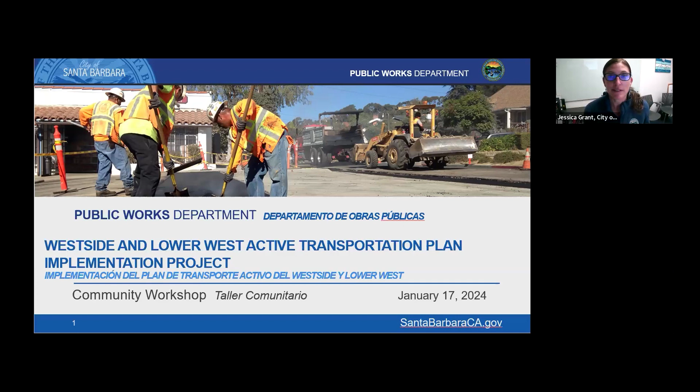The purpose of tonight's webinar is to provide some background on the council-adopted Westside and Lower West Active Transportation Management Plan, the funding we received from the Active Transportation Program, review the conceptual plans for the project, and review next steps on how to stay involved. Again, questions and feedback at the end. At any point, you're welcome to type in your question. We will answer both typed questions and if you want to raise your hand at the end, that works.

So let's get into it. The purpose of the Westside and Lower West Active Transportation Planning effort was to increase Westside neighborhood livability by addressing pedestrian, bicycle, and traffic safety issues and implementing the Vision Zero strategy. For those not familiar with Vision Zero, it's a council-adopted strategy aimed at eliminating all fatalities and severe injuries on city roadways. There are priority corridors designated throughout the city, one of them being San Andres.

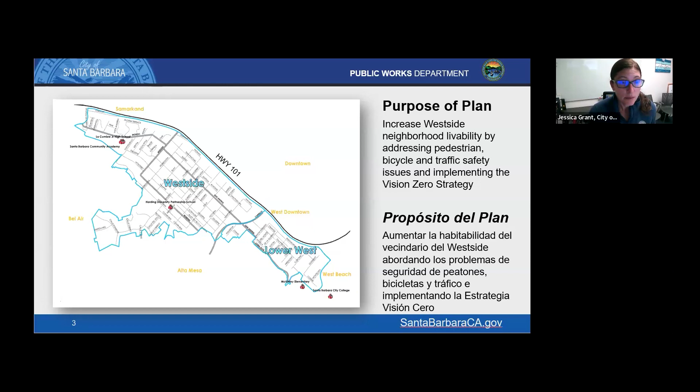So what happened during this planning effort? Back in 2019, we reached out to Westside and Lower West residents to receive their feedback on walking, biking, and driving in the Westside and Lower West neighborhoods. In addition to the in-person workshop, we also did a supplemental survey, and separately, our traffic engineering staff did a collision data analysis.

We wanted to hear from residents what their concerns and stresses were on how they navigate from their home to neighboring parks, schools, and neighborhood services. What were some of those stress points, and were we also seeing that reflected in our collision data statistics?

Then we came up with approaches on how to lessen those stresses, and we held another community workshop back in 2019 that received additional community feedback on what was liked and supported. All of that was summarized in the Westside Lower West Neighborhood Transportation Management Plan, which went through review and approval from City Council and was adopted back in 2020.

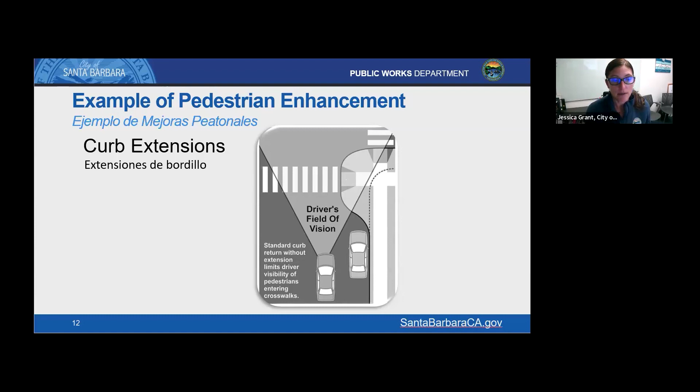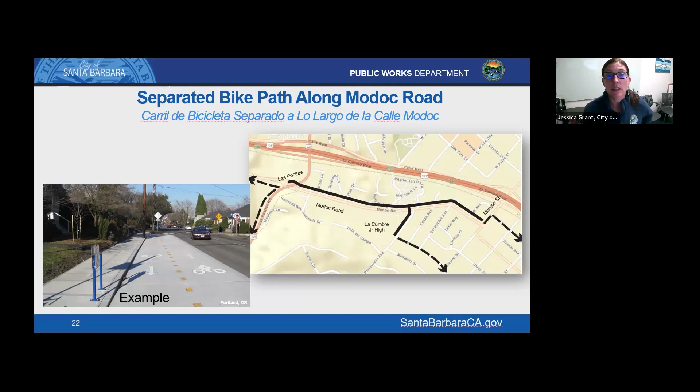So this is again just the same example image, and this is how the existing configuration is along Modoc Road - this is existing, in the daytime. There's no parking on the street from 7 a.m. to 6 p.m., with the on-street bike lanes.

So the graphic below, we would introduce all-day parking on the south side of the street, and then you would have your two-way travel lanes. There would be some sort of buffer between the vehicular traffic and the bike lanes. Here it just shows asphalt lanes, but we're trying to elevate it so it's the same height as the sidewalk, so we have a little bit more of a buffer away from the roadway to introduce that curb.

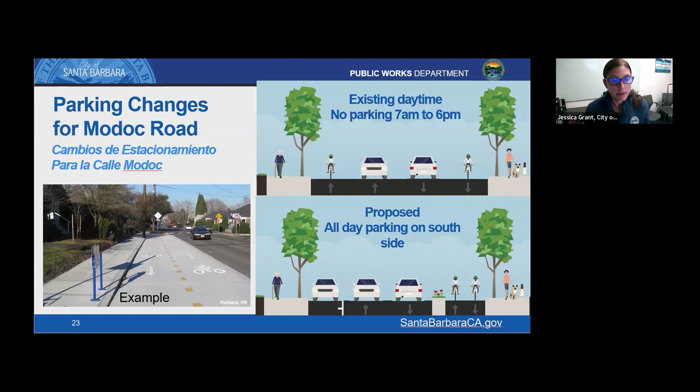And that would be the Modoc piece of it. And there would also be a connection. So this is Modoc and Portesuello, right at the intersection where La Cumbre Junior High and Santa Barbara Community Academy are located.

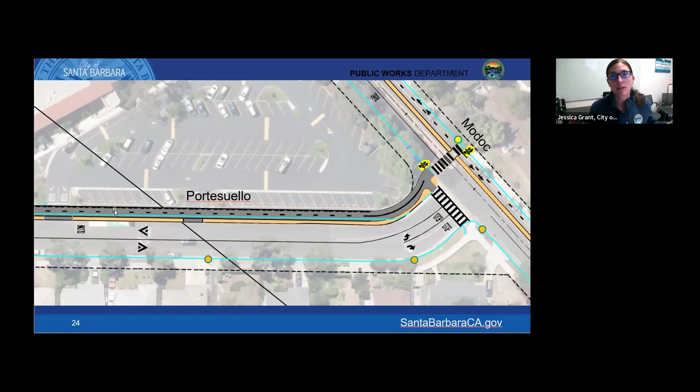So say a student lives on San Pascual, they'd use the bike path and the new updated intersection here with the rapid flashing beacons. Then they'd follow a multi-use path in front of the junior high.

Because as they continue west, that is where the bike parking is for the school. And then those students that live closer to Gillespie Street would come on the bike-friendly Bike Boulevard, then cross the street into the multi-use path just briefly before they can park their bike.

But for residents not going to school who want to go out to Henry's Beach or Arroyo Burro Beach, you'd hop on this, go to Portesuello, then out to Modoc, and connect into the path at the Las Positas Modoc intersection.

The only thing we're still vacillating on before we finalize the bike design on Modoc is right now it's a two-way cycle track on the north side of the street, and we're debating whether to keep it as a two-way cycle track or have one-way cycle tracks on both sides. We're still evaluating what that means for parking.

But we wanted to get your additional thoughts, especially if you're a commuter cyclist or familiar with riding on the west side, to hear your initial thoughts tonight, and we'd love additional thoughts at our in-person workshop. This may warrant a separate meeting all on its own.

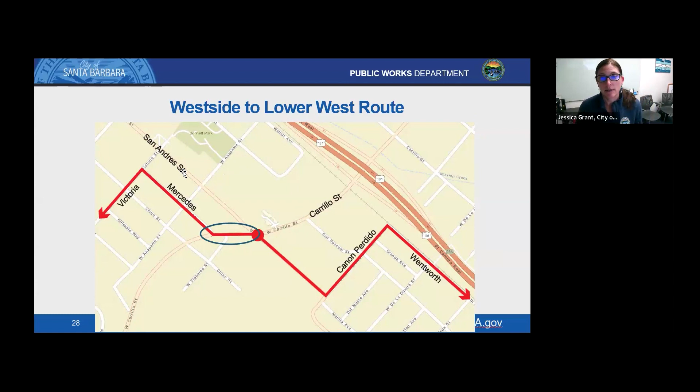So basically, how do we safely get you from the West Side to the Lower West neighborhood? Through community outreach efforts, this was the route we landed on. Again, what we hear from many is that unless you're a very confident cyclist, most do not like to bike on San Andres Street. So what's the parallel street we could use to connect riders from West Side to Lower West?

So from that, you have the bike-friendly street on Gillespie, then you could cut over on Victoria Street and head south on Mercedes Lane. It almost looks like an alley, a much lower volume street compared to San Andres. But once you get there, getting across the street on Carrillo is really difficult, so we still need to get back and land at the San Andres Carrillo intersection.

So here's how we'd address that piece. This is Mercedes Lane, and this is the current existing sidewalk. We propose to widen this and make this connection a multi-use path, so cyclists don't have to cross the very fast-moving traffic on Carrillo to get to the other side.

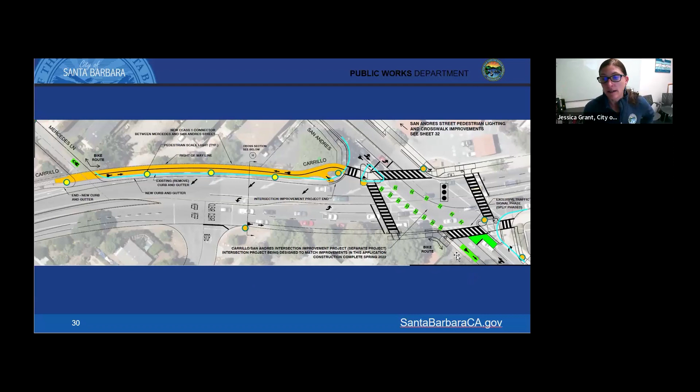This is what it would look like in plan view. Again, this is Mercedes Lane. The orange represents the multi-use path, which gets you to the intersection of San Andres and Carrillo. The green dots represent the wayfinding, or breadcrumbs, to get into an on-street bike lane on San Andres Street south of Carrillo.

So let's look at this piece. This is right now just an image with the church on the right and residential on the left-hand side. Currently, cyclists have to take the lane on this stretch of roadway, and what we've heard from many residents is that's not comfortable.

So we would introduce on-street bike lanes in this section. From a cross section, you would still have your sidewalk, still have parking on the residential side of the street, and then there would be a northbound bike lane, northbound travel lane, southbound travel lane, and a southbound bike lane. Parking would be removed on the church side of the street to accommodate this.

This is what it looks like in plan view. Again, we're crossing Carrillo Street and would go right into the on-street bike lane. This is the southbound route as you go into the Lower West neighborhood, with southbound traffic lane, northbound traffic lane, northbound on-street bike lane, and still have the parking lane.

We would also add some additional roadway lighting in this corridor, and then eventually you get to the Canon Perdido San Andres intersection. We have some intersection improvements here that would benefit all road users, with a big curb realignment at this point to decrease the distance for pedestrians getting across the street.

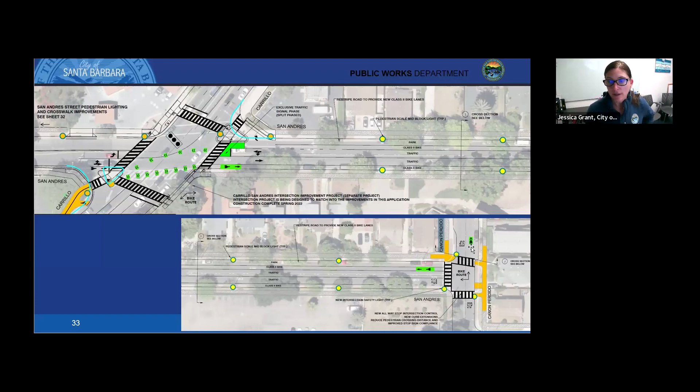For cyclists going further into the Lower West neighborhood, we also heard from many West Side residents that they continue on through the Lower West to get out to the waterfront. So this would be the connection here, following Canon Perdido Street into Wentworth. Wentworth is already a very low volume street, and then again you'd navigate your way out to the Lower West neighborhood to the waterfront.

What's not part of the planning effort, but we wanted initial feedback on tonight and at the in-person workshop, may warrant a separate meeting. We wanted to hear resident thoughts on whether we need a higher level facility on Micheltorena between Gillespie and San Andres. Right now, it's just cyclists taking the lane in that section of roadway, and we wanted to hear your feedback.

This is just one image, one block — I believe it's the 700 block of Micheltorena. What you see off in the distance, I grabbed this from Google Earth, is a Foodland right here. So what that would look like is we would potentially introduce a westbound lane coming into the neighborhood. As you know, when you go over the Micheltorena Bridge, there's now a nice designated protected bike lane, and we wanted to hear thoughts of continuing this bike lane for the couple blocks to get to Gillespie, which is one of the bike-friendly streets in the neighborhood.

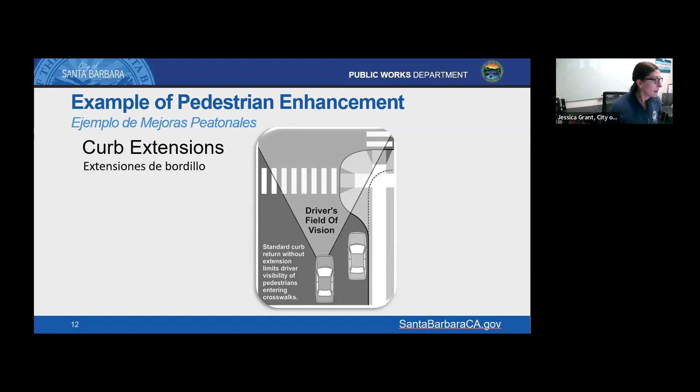Next question: How do bikes turn left from a two-way cycle track on the right side of the street, north side of Modoc, for example? As a cyclist, I highly prefer a one-way bike track on each side of the street.

Can you repeat that one more time? So turning left on the two-way cycle track—I'm missing the destination. It doesn't really give a destination. It just says, how do you turn left from a two-way cycle track on the right side of the street? They use the example of the north side of Modoc. I guess it's just kind of transitioning from a two-way.

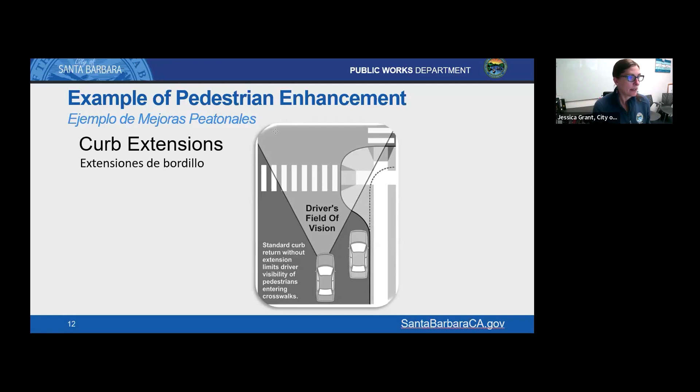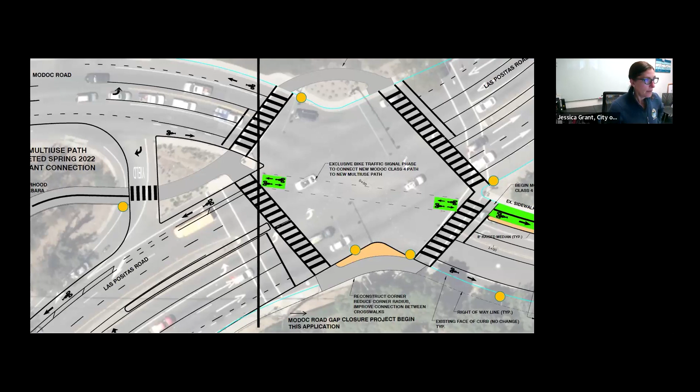It's a longer answer, and it depends on the particular intersections we're talking about for those left turn movements. For example, this would be the connection at Las Positas and Modoc. This would be the two-way path. If you're coming from the west side and want to go on the Las Positas Modoc multi-use path, we would introduce a signal phase for a diagonal connection into the path. I'll have to provide more detail.

The other left turn movements that would probably be most used would be getting into the school—that would be the Portesuello connection as well. The easiest part is that we have the layout and plans on our website. If there's more time, because I want to make sure we get to the majority of questions, I think you'll be able to trace the left turn movements for that.

But that's another question, and that's why we're vacillating—do we do the one-way cycle track or the two-way cycle track? That might be under further review. For the person that asked that question, if they could follow up in an email to us with their experiences along Modoc, that would be helpful.

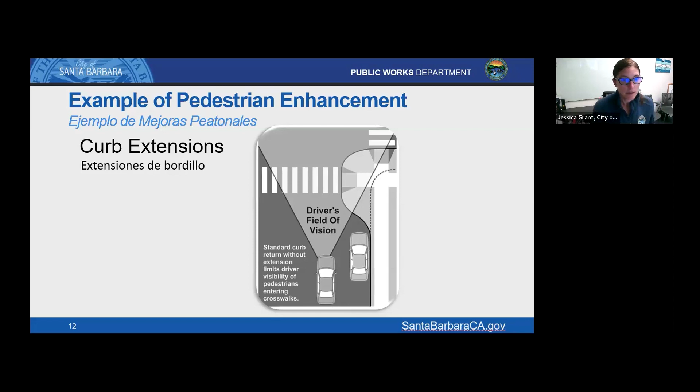There's other connections—one example we just put in on the west side is a very short but critical connection. If you live on San Pascual and want to go to the junior high, you arrive at the San Pascual Mission intersection, which as you know is super busy. So we created a bypass multi-use path for cyclists to hop on, so you don't have to cross into that very busy roadway along Mission. It's the same concept here—we don't want cyclists using the Mercedes lane to then cross the high-speed travel way on Carrillo. So it would be a mix of walkers, bikers, joggers, electric bikes, and conventional bikes, but with lower anticipated volume, the road users can coexist.

Next question: Is there any way to not get rid of all the parking on San Andres and Carrillo? Parking is not getting better.

Let me get to here. When we look at improvements and trying to improve neighborhood livability for all road users, there are always trade-offs involved. In that one section, the trade-off is parking removal on one side of the street, in exchange for on-street bike lanes. What was favored by the community and supported by council was parking removal on the church side of the street. But we have heard from many residents that on-street parking is very much treasured in the neighborhood, so we really try to minimize that. This is one stretch where, in trying to make our connections and facilities more accessible for all ages, the trade-off was removal on one side.

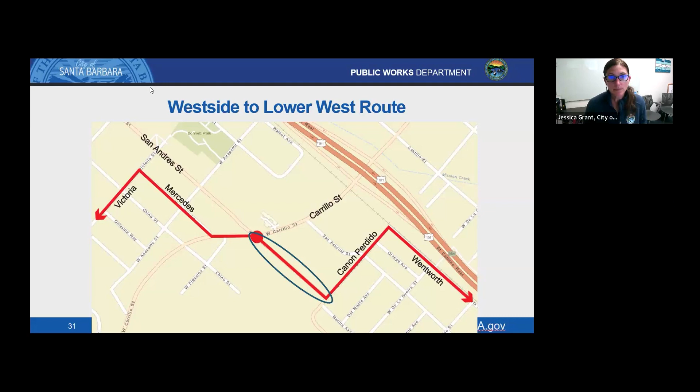Next question, more of a comment, was just the preference for one-way cycle tracks, unless it's the bike path in Las Positas. The comment continues: there is concern about having to cross MODOC to get to the bike path traveling westbound. So that's a preference for one-way cycle tracks.

Next question is, why not extend the path on Carrillo to Chino? There appears to be plenty of width for traffic going up the hill, and it might actually help to slow traffic on Carrillo.

Michelle, say that one more time. Yeah, the screen you have right there, I think this is a reference from Mercedes. It's suggesting to extend it to Chino Street, having that multi-path from Chino Street to San Andres. So, Derrick, did you want to hop on that to provide any additional feedback when we were exploring that initially?

Yeah, that's actually not something we studied in much detail, getting it over to Chino. The objective was trying to make a neighborhood connection just to Mercedes Street or Mercedes Lane. Thank you, it's something we can look into.

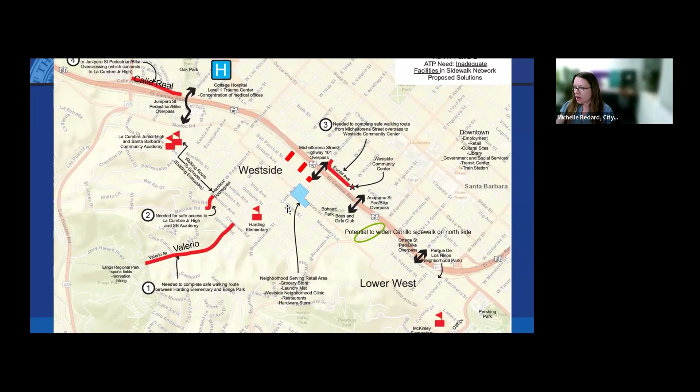Next, there's some surprise that there has not been a mention of the crazy intersection at Chino and Micheltorena. The person says, until recently, I lived at 1429 Chino, right at the corner of Micheltorena. There's heavy traffic, local drivers, the corner liquor store, deliveries and customers coming and going, cross-town traffic to the Mesa and Shoreline, etc., and many pedestrians, kids, families, babies and strollers. I witnessed bad driving, both seen and heard, drivers who don't wait for pedestrians, too many guys with something to prove, speeding away from the intersection.

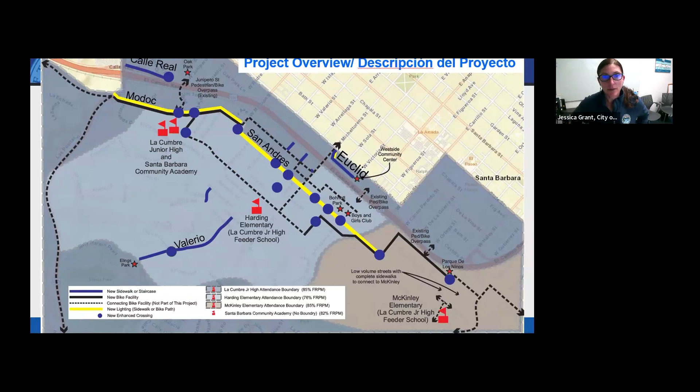Just a quick response to that: regionally, we all set aside grant funding towards education through Move SBC. That would be the city of Carpinteria, the county, us, city of Goleta, etc. They also do education in North County as well. I encourage you guys, if you're interested, there's a lot of great opportunities, especially through Bici Centro, on basic bike mechanics. There's special classes for women on how to maintain your bike, and they offer adult classes as well. If there's enough demand, we can work to have specialized training in certain neighborhoods.

Next is a question about whether there will be more garbage cans added. It's not very specific, so if they could follow up with an email to highlight some of the issue areas, that would help. Garbage cans aren't scoped in this project, but I'd prefer our environmental services team respond to that, so please provide some details and issue areas you're seeing.

Next question: are there plans to put up traffic signs for the recent speed humps added on San Pascual from Mission to Arrellaga streets? The question was about the new bike-friendly infrastructure with the various speed tables and speed humps. Could you quickly go over what we do in post review once we have a new traffic treatment?

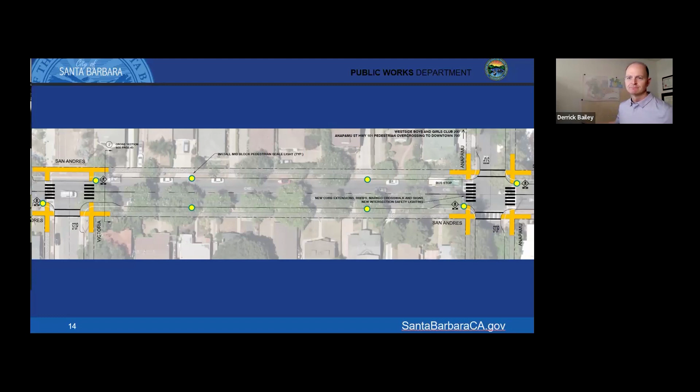Michelle, I think there is one person with their hand raised - if we could take one of the comments that way. Oh, I don't see that, oh no, okay the hand's down now. Okay, alright, then keep going on. I want to be respectful of everybody's time. We have about how many? 13 questions. Okay.

Next question: great to see all the rapid rectangular flashing beacons and expedited installation for pedestrian crossings over San Andres, and the new bike lanes planned on San Andres east of Carrillo into lower west neighborhoods, and bike box at Carrillo intersection. Agree with the added bike treatments on West Micheltorena Street between San Andres and Gillespie. Thank you for the webinar and the open house. Thank you for your comments, and yes, you're welcome.

Next item: for the Upper Valerio Street sidewalk infill, how will the new sidewalk navigate existing features such as decorative mailboxes or a large oak tree? Will the sidewalk bump out into the street, or will the mailboxes and trees be removed? Would homeowners receive any compensation for losing their mailbox or tree? Those are all great questions. As part of the design, we got a survey in place to understand all that's potentially in the path for the new sidewalk layout. There's always the goal to try to preserve as many existing trees as feasible, but we'll go into those details more as we complete the design, and that does trigger a lot of one-on-one meetings with adjacent property owners. Sometimes for tree preservation we're able to pinch the sidewalk down just a little bit in that one section to preserve the tree. But I can't remember if we have quantified our ballpark for tree removal - I'm not sure yet, but that is something we will follow through in the design.

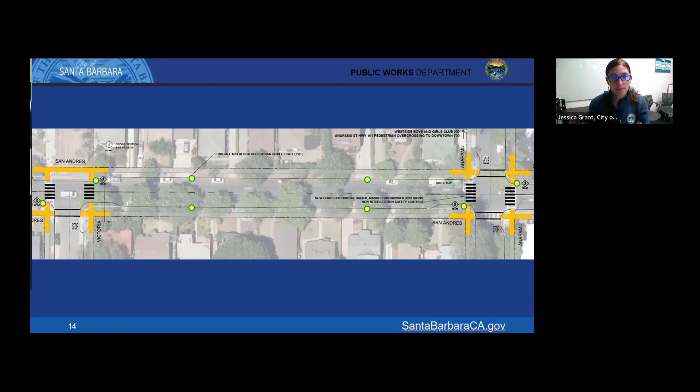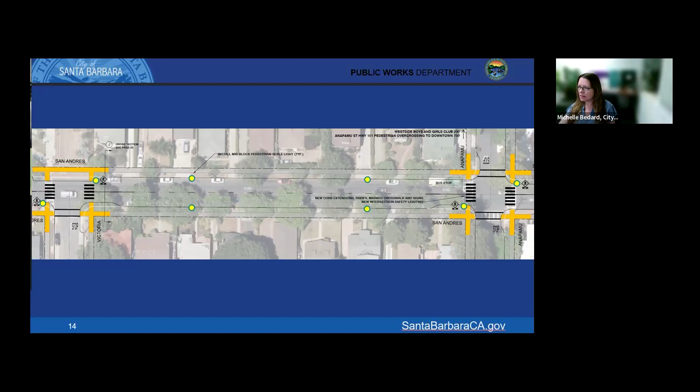Great, thank you. Next question - I just want to take a moment to mention, I'm not sure, it's from an anonymous attendee, and I think they're trying to get to a particular slide from the presentation. It's not specified, it just says don't revert to ending slide, leave the one slide. If this person can follow up and clarify what they want to see - like the last slide, or the questions, or the websites. Thank you, Jessica, for going to that. I'm not sure if that's the one they wanted, but that's a good one to put for now. And if there's another slide you want to see, please add your comment or raise your hand.

Next item: all these improvements are very exciting and urgently needed. Is it possible for beg buttons at all traffic lights to be eliminated for cyclists in favor of loop detectors? And can such buttons be set to prioritize pedestrians and bikes to minimize the time we're breathing traffic fumes at intersections?

So if I'm understanding correctly, for the rapid flashing beacons, are they also accessible for cyclists? Not familiar with the terminology, but it says 'bag can you button.' Can you reread that, Michelle? It says, is it possible for, in quotes, 'beg buttons' at all traffic lights to be eliminated for cyclists in favor of loop detectors? And can such buttons be prioritized for pedestrians and bikes to minimize time waiting and breathing in traffic fumes?

So a beg button is another word for a push button. There's only one traffic signal in the city that has a push button, the new contraflow lane northbound Castillo at Micheltorena. The city uses video detection pretty widely, generally better for cycling detection than loops, especially if you have a bike that doesn't have a lot of metal parts to it. So that's the city's strategy for bicycle detection.

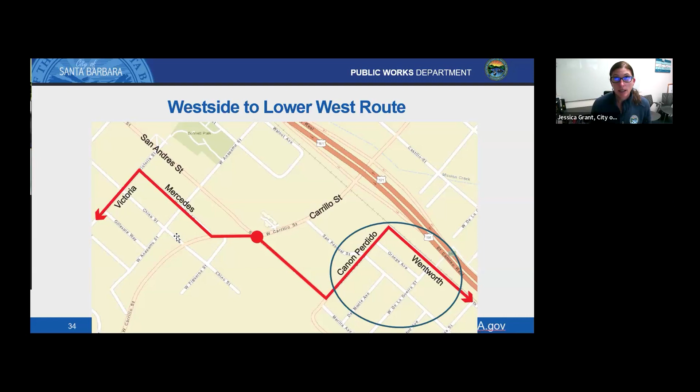Okay, thank you. Next is a question: if there are any changes on Micheltorena, should they consider the delivery trucks to Foodland that take up the entire traffic lane? Thank you for bringing that up. That's something we definitely need to weigh in on, that westbound bike route and the conflicts with the delivery trucks. That has been brought up from lots of Westside residents throughout this process, and yeah, we're trying to land on a good design that is safe.

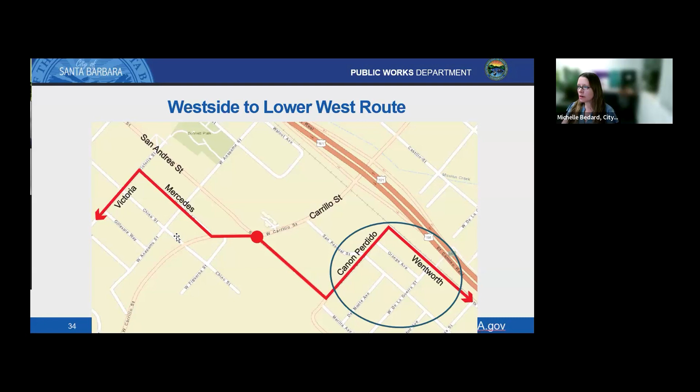Okay, thank you. Next: since there is a lot of illegal parking in the bike lane on Micheltorena, as well as illegal turns and crossings before the bridge, along with running of lights on San Andres and Micheltorena, the situation is often very dangerous for cyclists and pedestrians. What is the plan for increasing enforcement? Thank you for the comment. I would probably like to hear a little bit more from that person - reach out by email with observations, or time-of-day observations, that could help direct things from an enforcement standpoint. Thank you.

Next, thank you Jessica and everyone. This is the best city community meeting I have attended in 20 years. Well organized, great visuals, no city jargon, acronyms, generous time for questions, continuous Spanish interpretation, thoughtful and knowledgeable replies to every question. Well done, thank you for that. Yes, good job, thank you.

We appreciate the comment. Next, are there any plans to clean the existing Cornell Hill path behind McKinley School, which is an important student pedestrian neighborhood connection? It is still damaged from the floods.

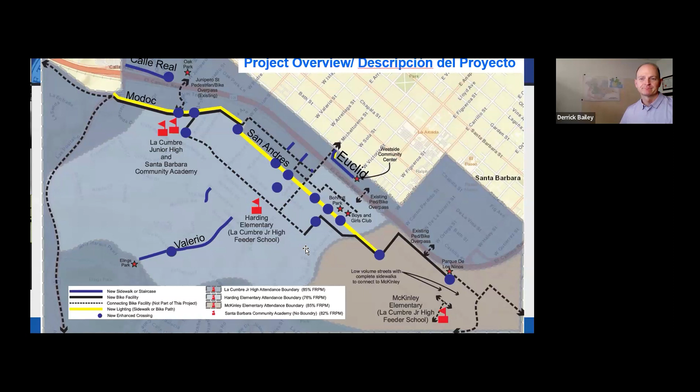Thank you. Next, referencing SB Move: Move is teaching an e-bike skills and community ride this Saturday from 1 to 3:30 at Goleta Valley Junior High. Just a shout out for that - you can sign up online at movesbcounty.org/events. If it is raining at 10 a.m. it will be rescheduled to the following Saturday, January 27th. That's from Vanessa, the education and encouragement coordinator.

Thank you, Vanessa, for that comment. And I'd encourage those that have e-bikes, or somebody in your family, to go. Even if you don't have an e-bike, it's still good because a lot of the education is just your standard rules of the road, and they're always very helpful.

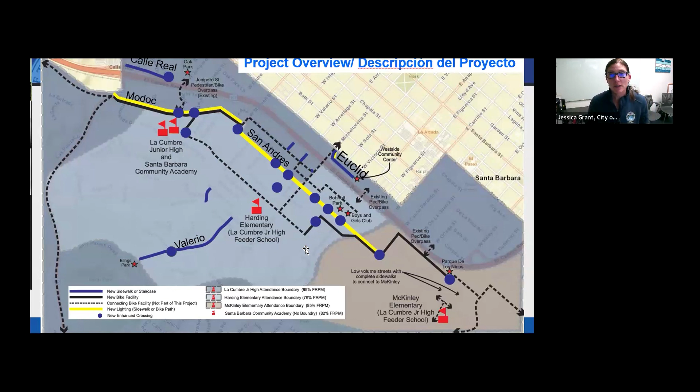Move does a fantastic job at these types of trainings, so I highly encourage residents to go - yes, the Goleta Valley event. If you have kids, you most likely received something in Parent Square about the upcoming event. So thank you, Vanessa, for sharing that with us on the call tonight.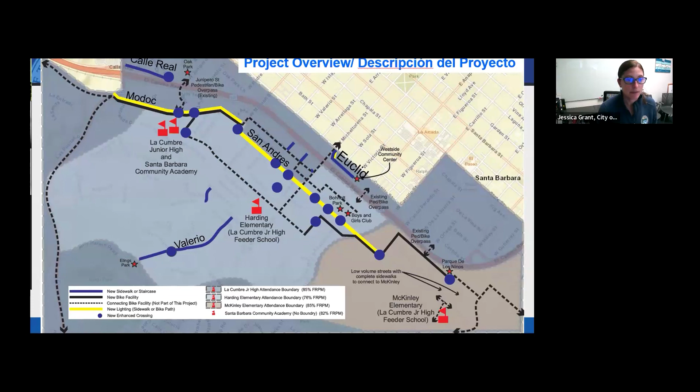Thank you. Jessica, if you could jump back to the questions slide. A follow-up for Derek: I missed the answer, but will the part-time bike lane be removed on the west side of Gillespie, north of Mission? Street sweeping, moving cars is tricky on Thursday.

No, the only parking restrictions that were eliminated were on the east side, and the reason for that is the way the intersection is configured at the Gillespie Mission intersection. It really cuts down on the northbound traffic volume, so for cyclists going north towards Portesuello, they don't have a lot of conflicts.

But there are no restrictions for southbound traffic, so from Portesuello going towards Mission, especially for children after school - that's why that route was initially established. They're still competing with a lot of traffic going in that same direction.

I understand the closing of Loma Alta for the rainy season, but as a cyclist and a car driver, it would be a great loss of a short route to the beach and to SBCC if the road were closed permanently to car traffic.

This route also alleviates some of the traffic on Castillo and Bath to go to and from SBCC, Leadbetter, and the harbor area. If you weren't part of another webinar we had recently, we also received grant funding, about $27 million, along Cliff Drive to put a separate multi-use bike path in one small section as you climb up the hill from the Lower West neighborhood to City College. From a grade perspective for cyclists, Loma Alta versus Cliff, it's less of a grade along Cliff Drive. So we anticipate for Westside and Lower West residents, as you hook into Montecito and then it turns into Cliff, that would be its own path to get up to City College.